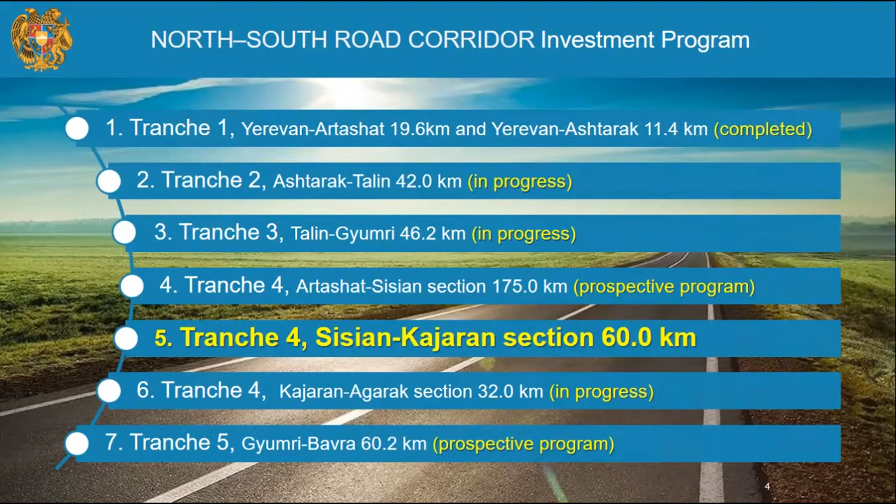On this map you can see the geographic location of the tranches. The southern section of our program is Tranche 4, which consists of 3 sections: Artashat-Sisian, 175 kilometers, Sisian-Kajaran, and Kajaran-Agarak.

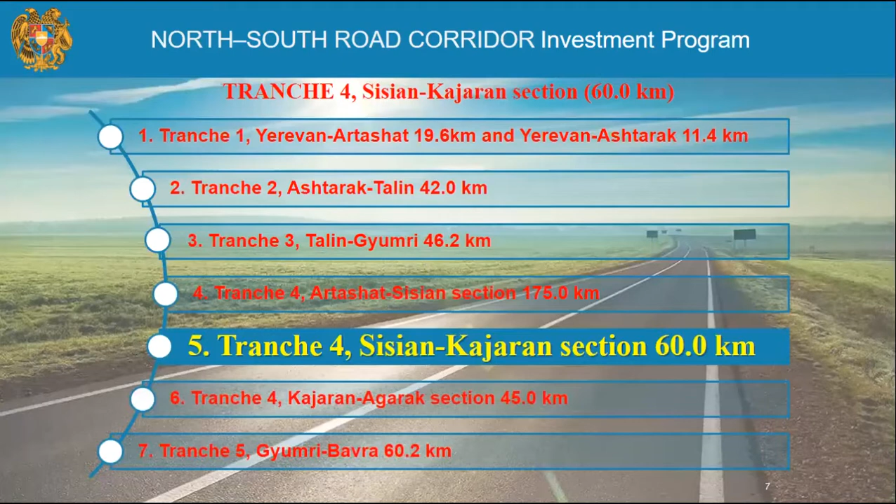Now, a little bit in detail about the Sisian-Kajaran section. This section will be a completely new road. It is planned to construct a new second technical category road with a total length of about 60 kilometers, including 4.7 kilometers of bridges and tunnels totaling 12.5 kilometers in length. The longest is the Bargushat tunnel, with a length of about 8.6 kilometers. The Kajaran section was designed with a new alignment, outside of the existing alignment and interstate road, and the existing road can be used as an alternative road.

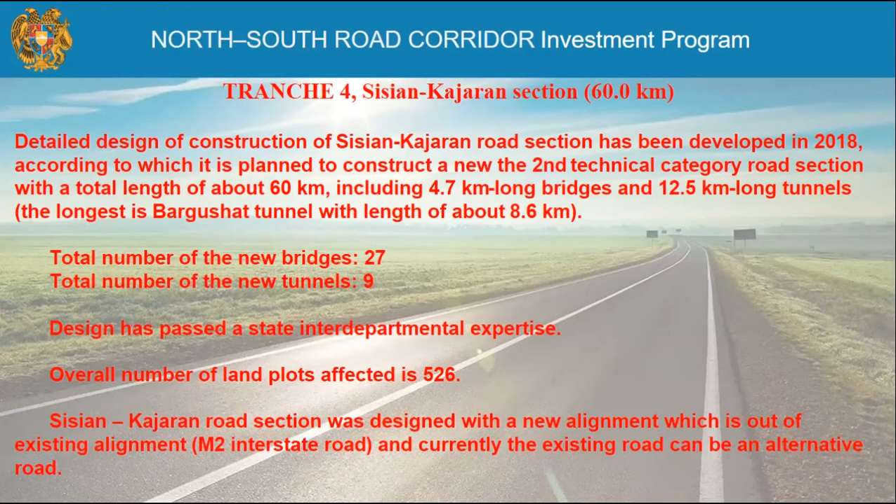This increases convenience for heavy vehicles. The travel time from Sisian to Kajaran will be reduced, which will reduce travel costs. Next slide, please.

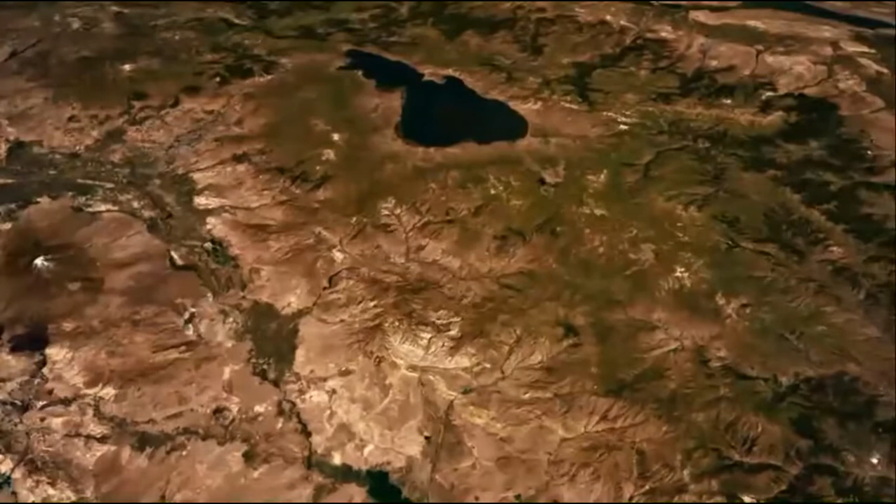North-South Road Corridor, Tranche 4, Sisian-Kajaran section. A preliminary evaluation of the Artashat South-Kajaran section of the North-South Road Corridor has been carried out. The aim of the new road corridor is to create access to the Black Sea through Armenia and Georgia, and then to European countries. It will provide new opportunities of development to all communities along the route from the north to the south of Armenia. The fourth tranche is located in the southern sector. It begins from Artashat and ends on the border of the Republic of Armenia and the Islamic Republic of Iran.

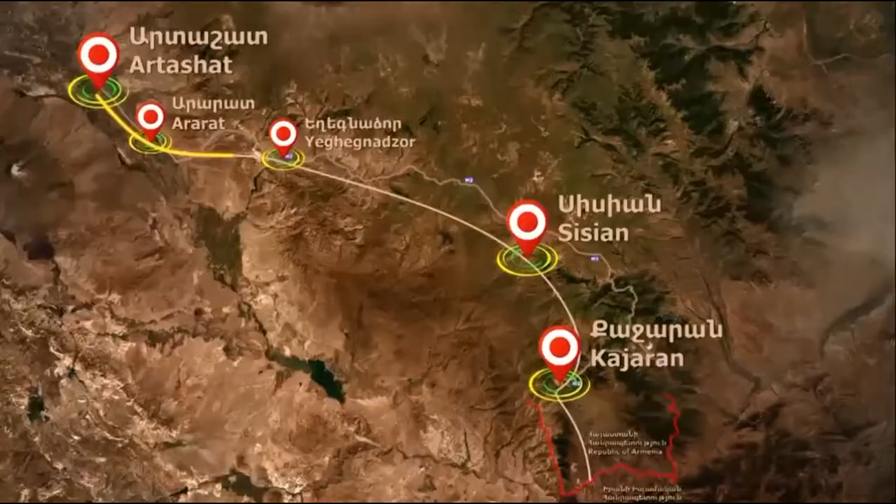The scope of works includes the feasibility study and preliminary design of about 300 kilometers from Artashat South to Kajaran, and about 60 kilometers of detailed design of the priority section.

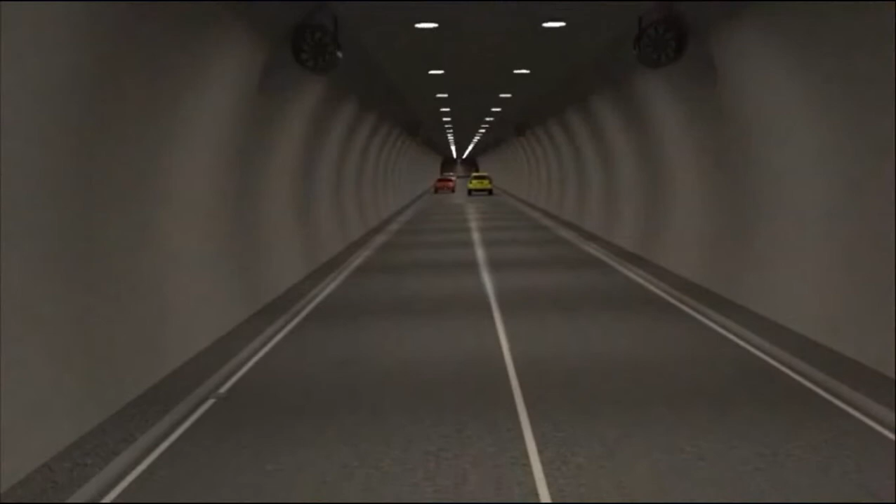Design criteria: the main road cross-section is arranged with two single running lanes, one for each direction, and one climbing lane. Climbing lanes are provided to facilitate the passing of trucks and slow-moving vehicles whose speed drops because of sustained steep grades. Climbing lanes are designed independently for each direction. For tunnel sections, climbing lanes are not included due to the huge increase in cost and the increase in dimension of the tunnel section, compared with the benefits.

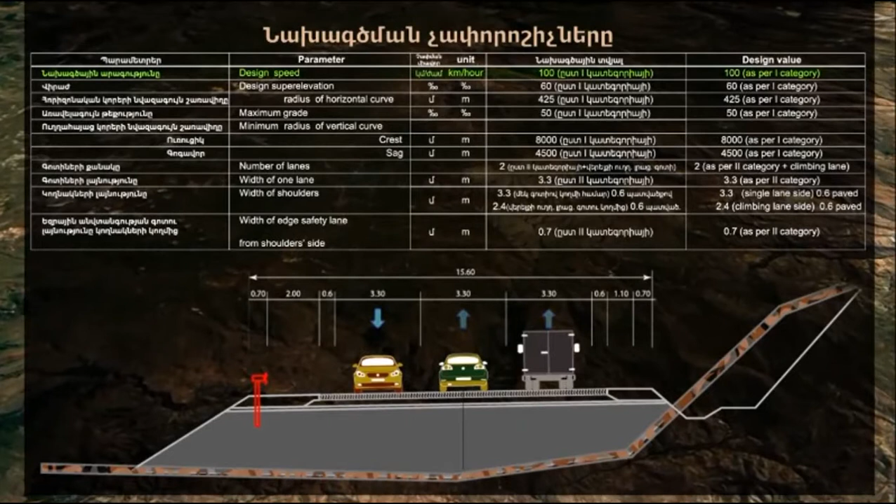Design speed as per first category is 100 km per hour. Number of lanes is 2 as per second category, plus a climbing lane. Width of one lane is 3.3 meters as per second category. Width of the shoulders is 3.3 meters for the single lane side, and 2.4 meters for the climbing lane side.

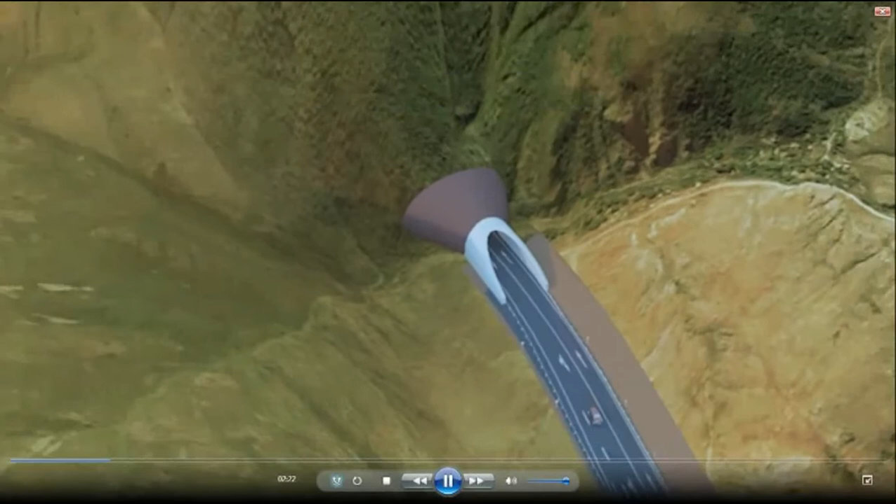Description of Sisian-Kajaran section: it begins from the southern foot of Mount Metsishkhanasar, at 3,550 meters. It crosses the M2 highway, passes through the left bank mountain slope of the Vorotan River, and crosses the Vorotan River through the upper part of Sham water reservoir.

Then it passes through the nearby areas of Vaghatin, Vorotan, Darpaz, Lor communities, crosses the Bargushat Ridge with spot heights of 3,000 meters and higher, through the mountain slope on the left side of the Shenatagh tributary, and passes through the mountain slope on the right side of the Voghji River Valley, in the vicinities of Nor Astghaberd and Geghi community. Finally, it reaches the right side mountain slope of the Kapan-Kajaran road section and continues to the entrance of the communities of Kajaran and Lernadzor.

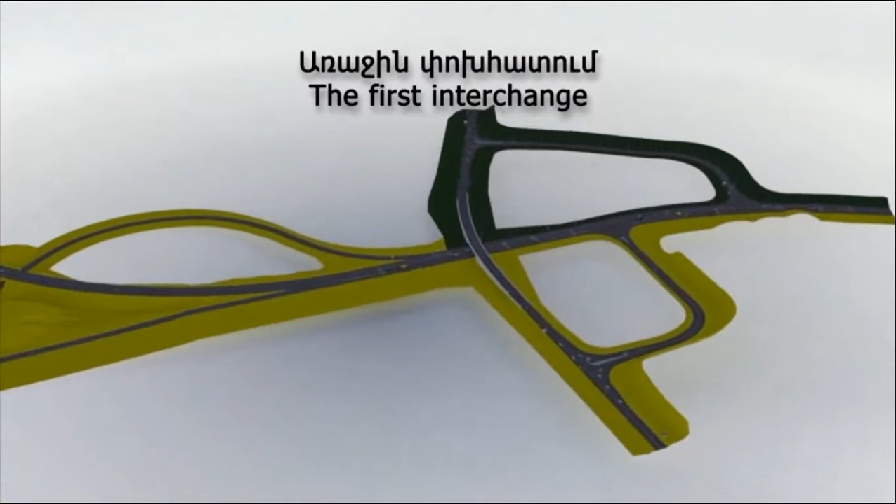Three interchanges are designed for the Sisian-Kajaran section. The first interchange is designed within kilometer 0 plus 0 and kilometer 1 plus 0, with the aim to connect the existing M2 and local roads with the newly designed Sisian-Kajaran road.

The road will be furnished with safety barriers. Road signs will be placed to ensure traffic safety. From this preliminary analysis, in many sites the need for retaining walls is envisaged. The drainage system will be ensured by calculating water flows with culverts of different sizes and drainage chutes.

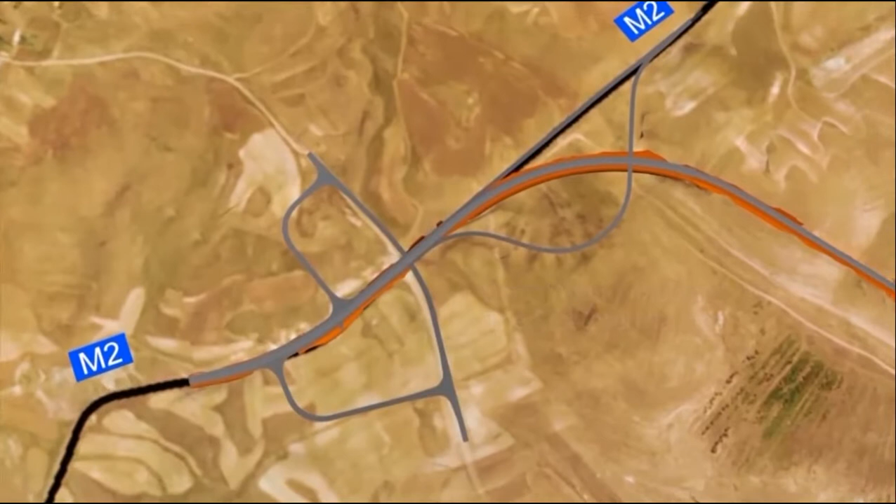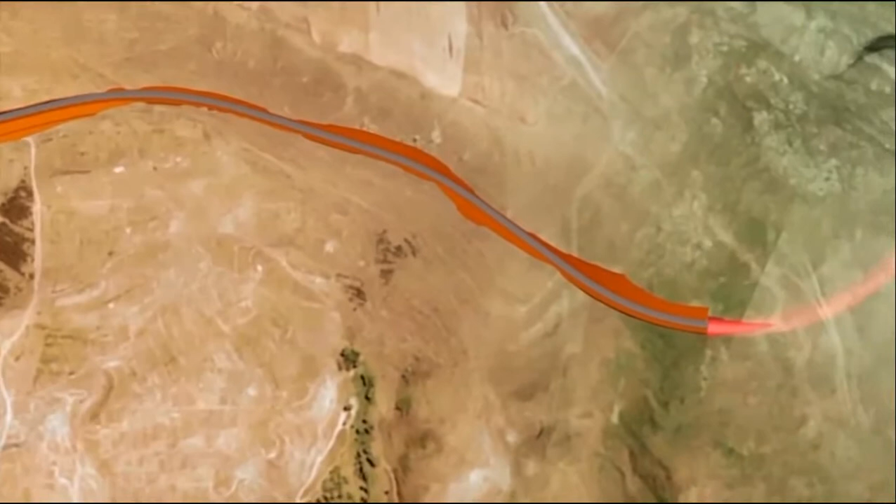Excavated soil and aggregates shall be reused as much as possible. The site location of topsoil stockpiles and excavated material landfill will be properly designed. Permit and access to those sites should be obtained prior to the commencement of excavation works.

Air quality, noise and vibration shall be surveyed during the environmental impact assessment process in order to update the environmental baseline data.

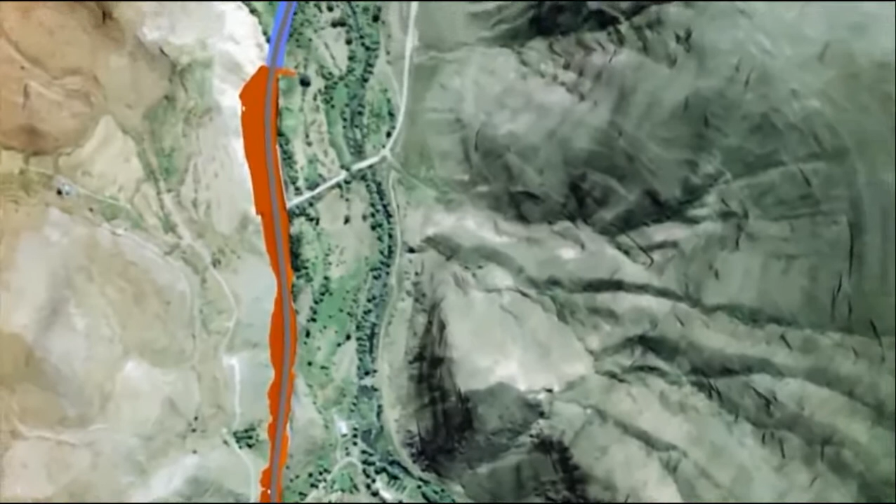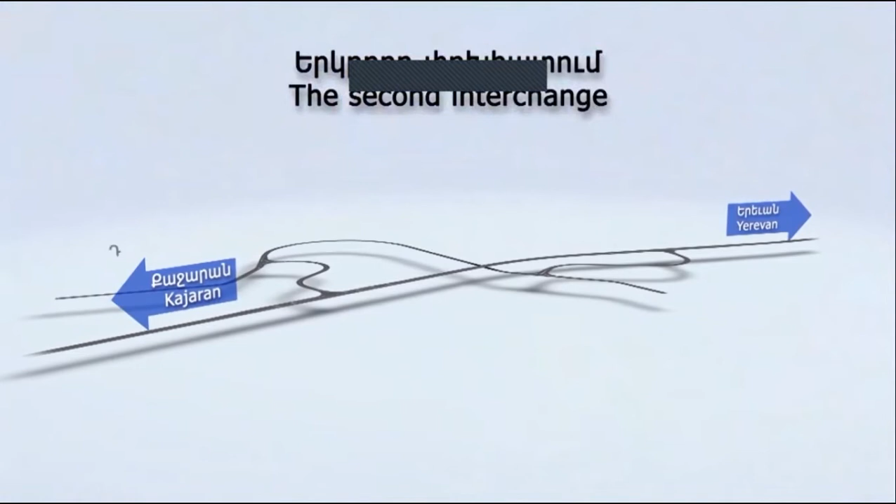The second interchange is designed within kilometer 15 plus 400 and kilometer 16 plus 300, with the aim to connect local roads to Vaghatin, Vorotan, Sham, Lezen, Tatev, Darpaz, Getatagh, Lor, and Shenatagh with the newly designed route.

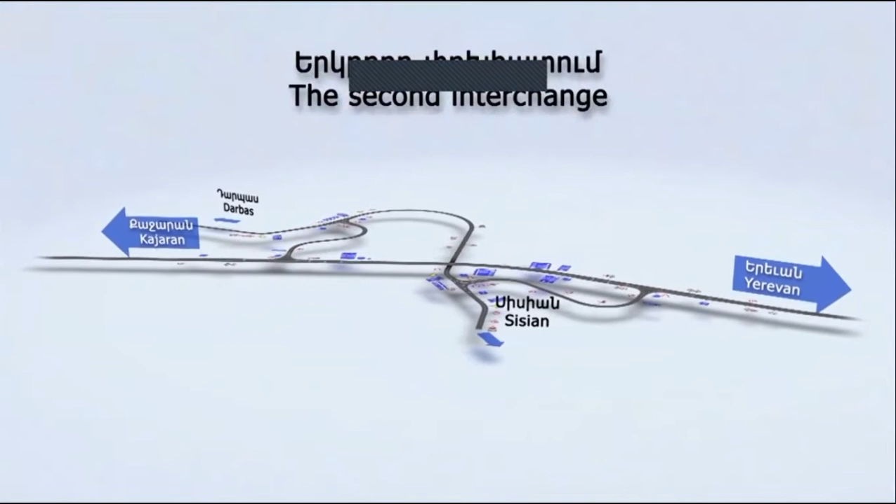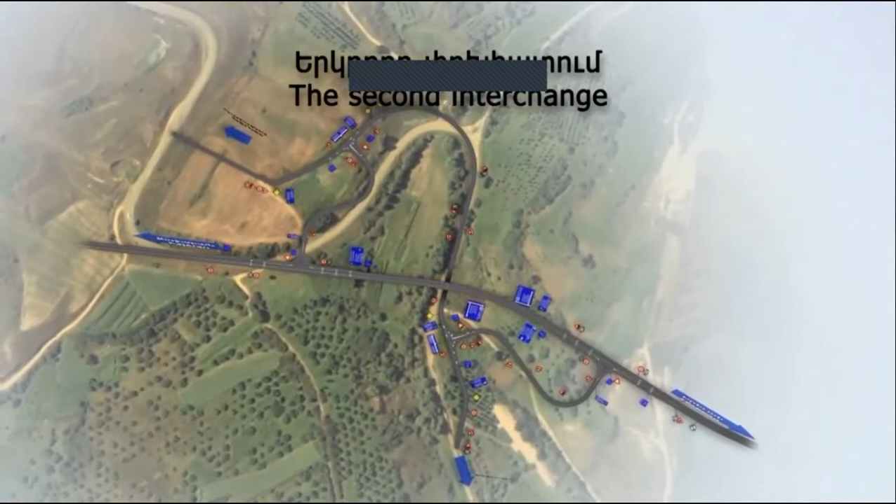The Sisian-Kajaran tranche of the North-South Road Corridor lies in a region of complex geology, characterized by extensive quaternary volcano-sedimentary deposits in the northern part, and by an orogenic belt constituted by sedimentary, igneous, and metamorphic rocks in the central southern part.

Road excavation will encounter a large variety of conditions, ranging from debris deposits, usually in a loose state, through partially cemented lacustrine soils, up to strong, medium to slightly fractured igneous rocks.

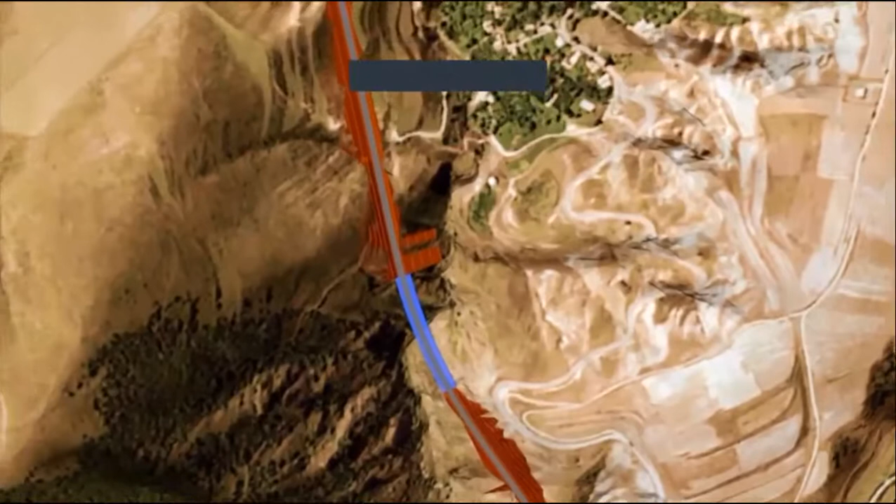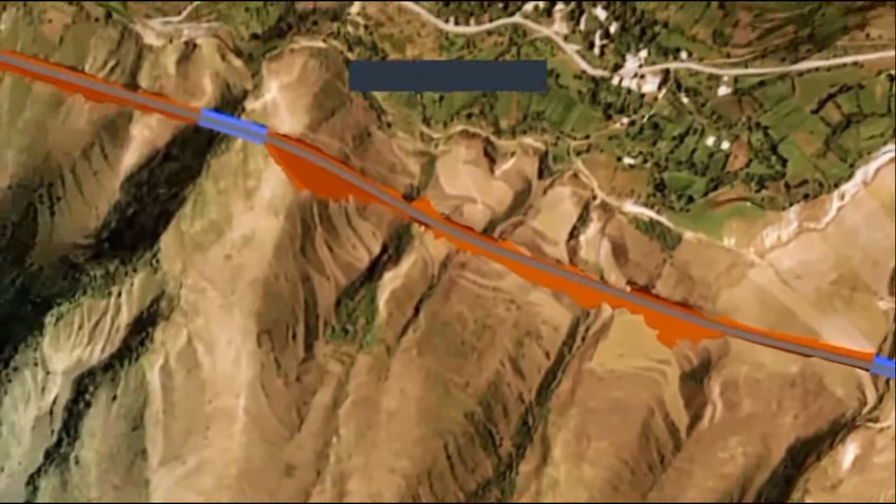Landslide activity along the valley sides is relatively limited, affecting mostly the superficial soil cover. However, a few large paleo-landslide bodies have also been identified that now appear to be in a stable state. Road foundations will usually rest on fair ground. Nevertheless, the use of piles may be required, especially for the abutments and piers of bridge structures crossing loose deposits.

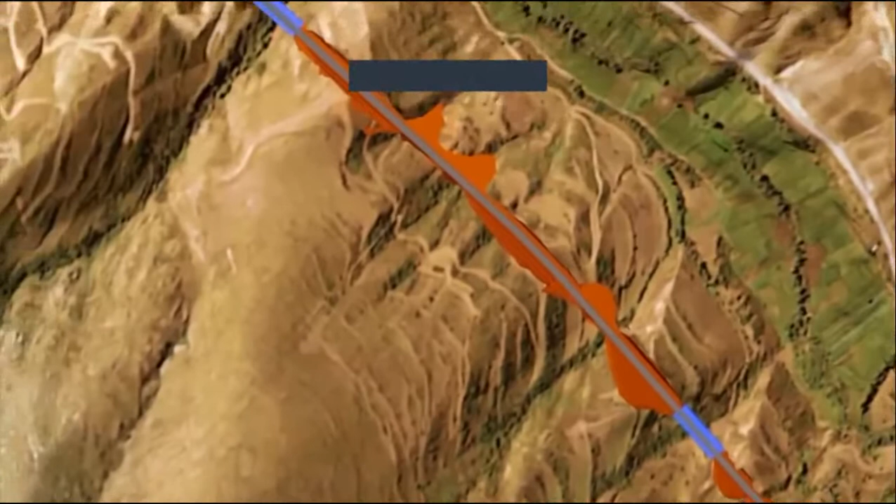The main obstacle of the Sisian-Kajaran road section is represented by the Barghushat Ridge, about 3,200 meters above sea level. The proposed solution is to cross the ridge with the Barghushat Tunnel, which is 8,683 meters long. For this reason, safety issues are an important concern.

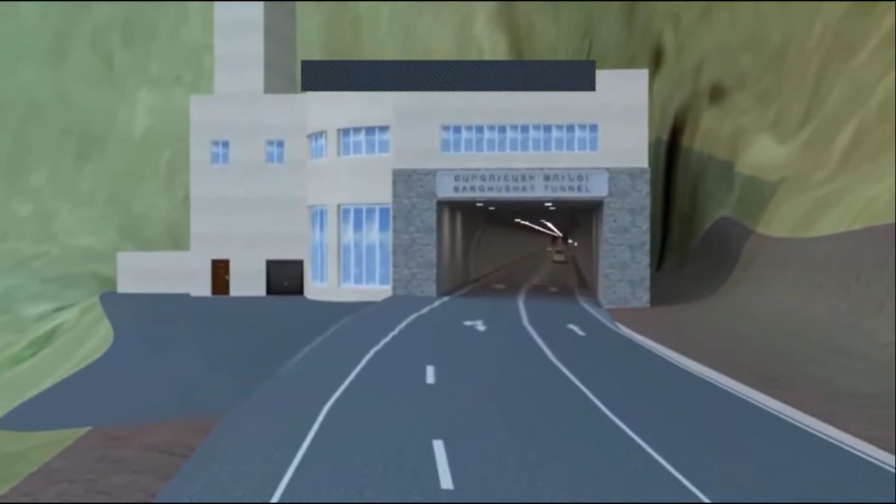The following prevention measures will be ensured: lighting, fire system, escapeway, access to escapeway every 500 meters, lay-by every 1,000 meters, SOS every 250 meters, smoke extraction, and ventilation.

In case of fire, the smoke is extracted by ventilation systems at both ends of the tunnel, inside the smoke extraction duct. People will have an escapeway located under the platform every 500 meters, and then an escape route to a safety place.

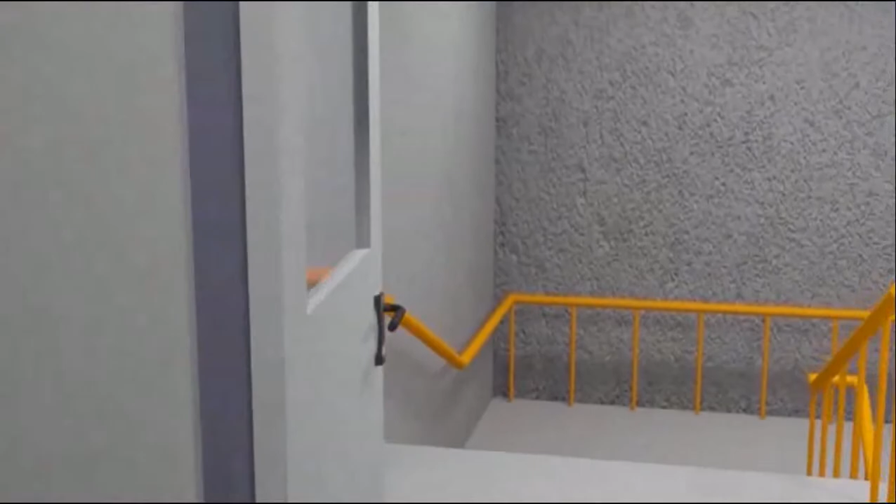In case of fire, passengers can reach the nearest emergency exit, one every 500 meters, and through the door and stairway reach the escapeway located under the road platform, which runs all along the tunnel and finishes at both extremities with an exit to the outside. The entire zone, stairway and escapeway, is kept under pressure in order to avoid the entrance of smoke and allow a safe exit to the passengers.

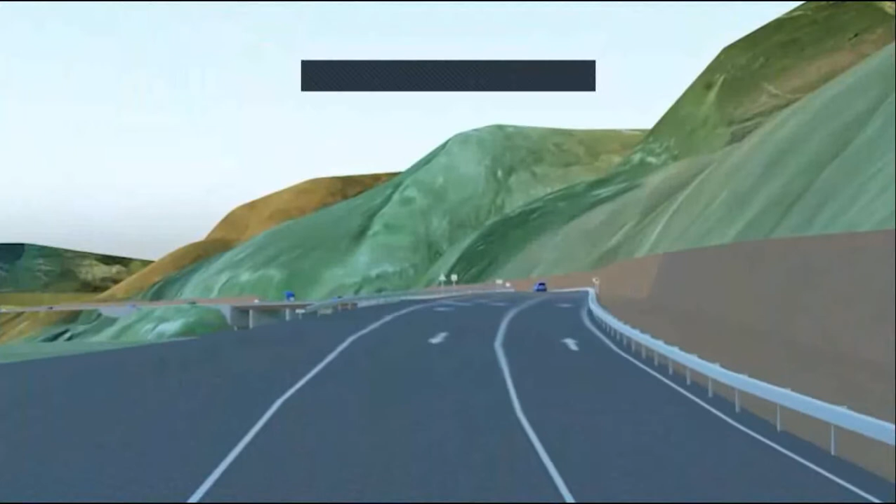The geological conditions along the base tunnel, with length exceeding 8 kilometers and a maximum overburden of 1,160 meters, are foreseen to be extremely variable due to the complex geological structure of the Bargushat mountain range. Therefore, a high level of geological risk should be expected.

Up to the Barghushat Tunnel and after that, the area is characterized by challenging terrain, especially in terms of vertical slopes. Due to the complicated relief features of the area, a large number of bridges and tunnels are designed.

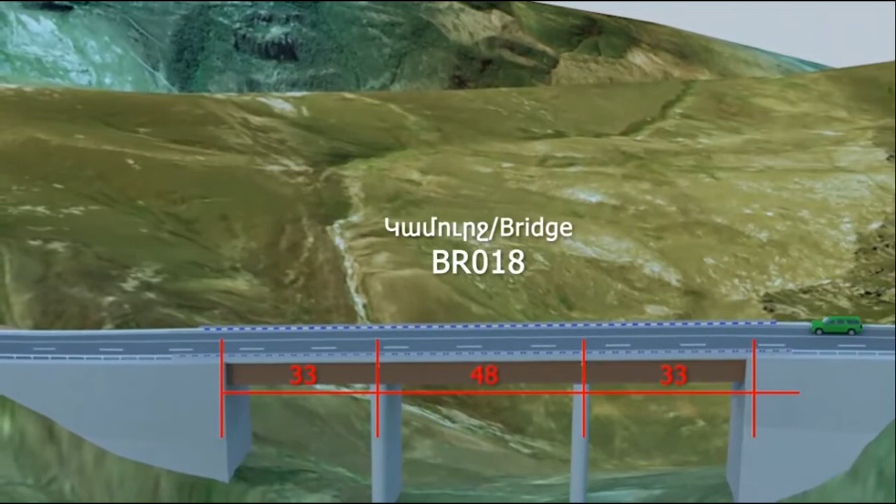There are numerous archaeological and historical cultural values in the area: ancient settlements, castles, churches, tombs, and so on. The number of archaeological sites is likely to increase after a more detailed study and research of the area.

The road is located in an area with high recreation and tourism activity, and it is obvious that the implementation of the project may have a direct impact on it.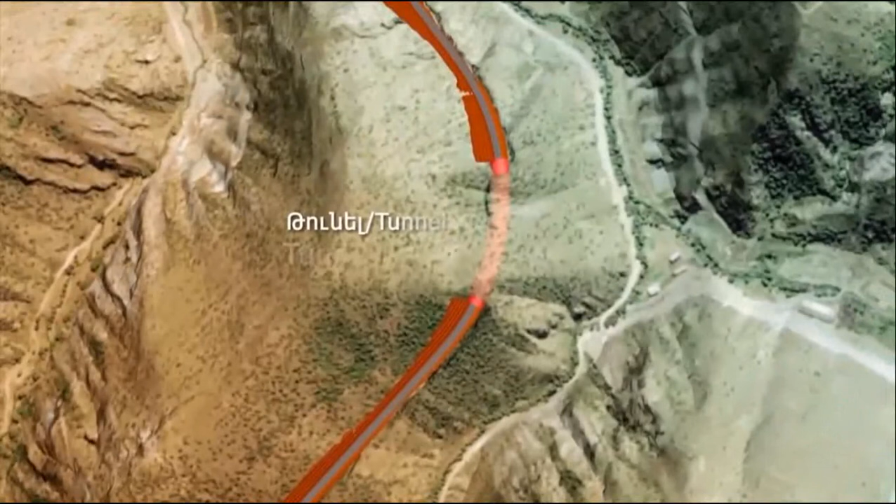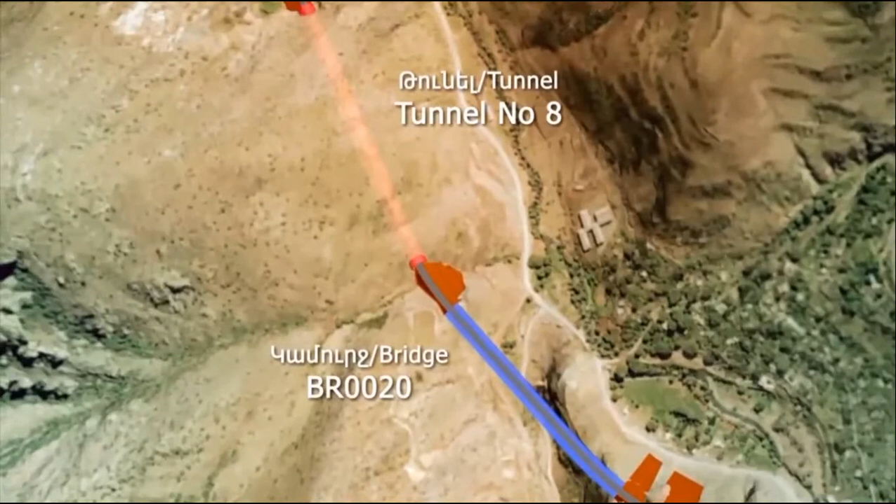In the cut sections, the maximum height of the cut is 10 meters. The slope of the cut is related to the type of soil. Every 10 meters, a 2-meter bench is located to assure the stability of the cut and to accommodate the rolling material coming from the top.

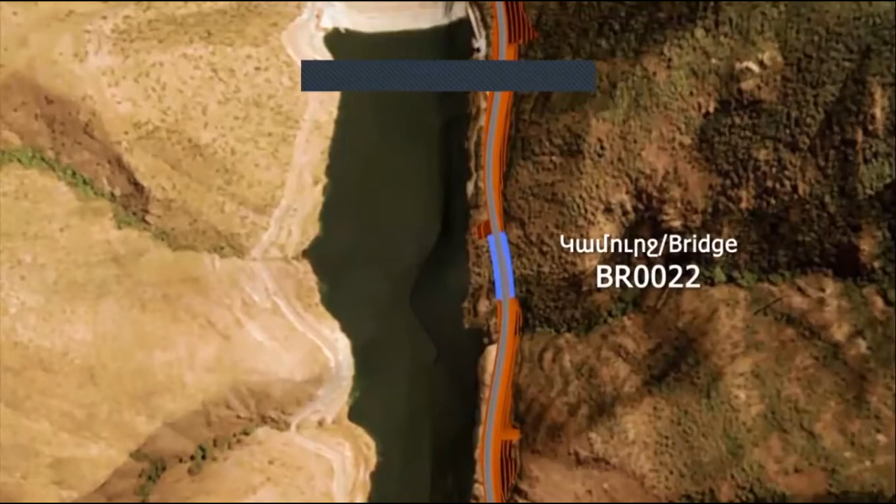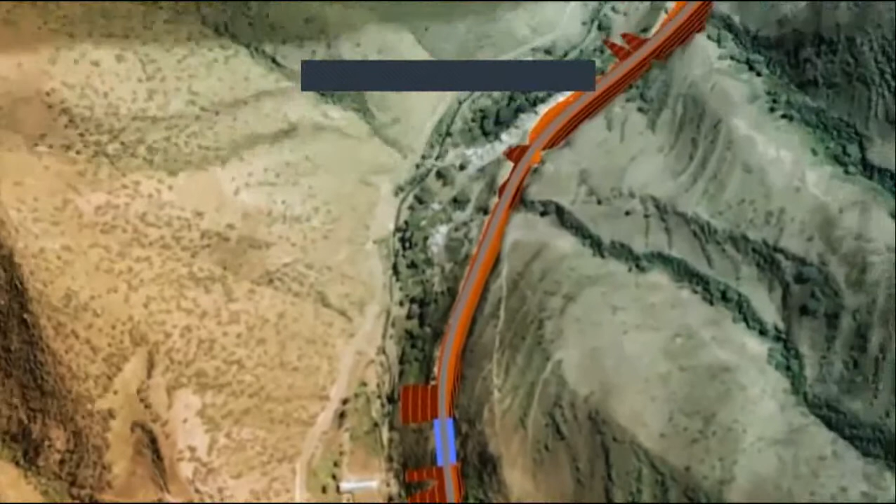There are agricultural and non-agricultural, special use, forest, and water lands in the affected communities of the Syunik province. Most of the affected lands are community-owned. The studied corridor project does not have any negative impact on the quality of the soils for the surrounding areas.

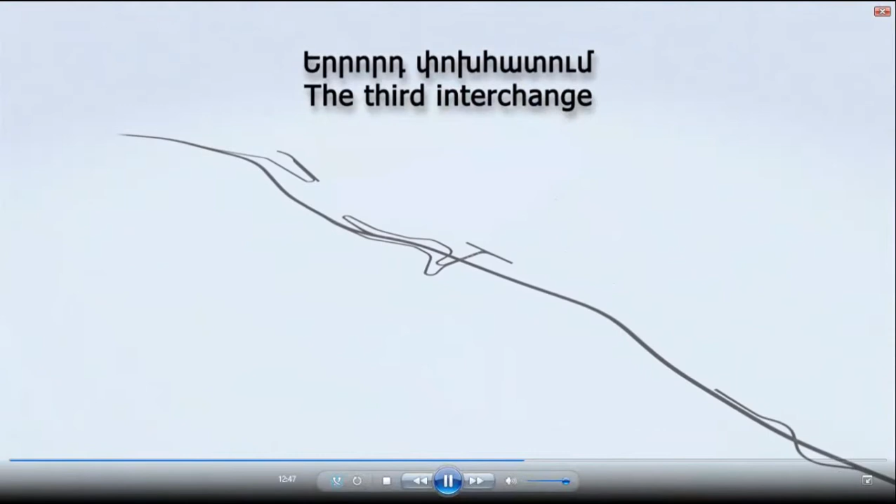The third interchange is designed to connect the newly designed road section to the existing road between kilometers 55 plus 500 and kilometer 59 plus 0, through which the movement of vehicles will be implemented with Kapan and adjacent communities.

This intersection will give an opportunity to move with separate ramps, from Kapan to Sisian, from Sisian to Kapan, from Kapan to Kajaran, and from Kajaran to Kapan.

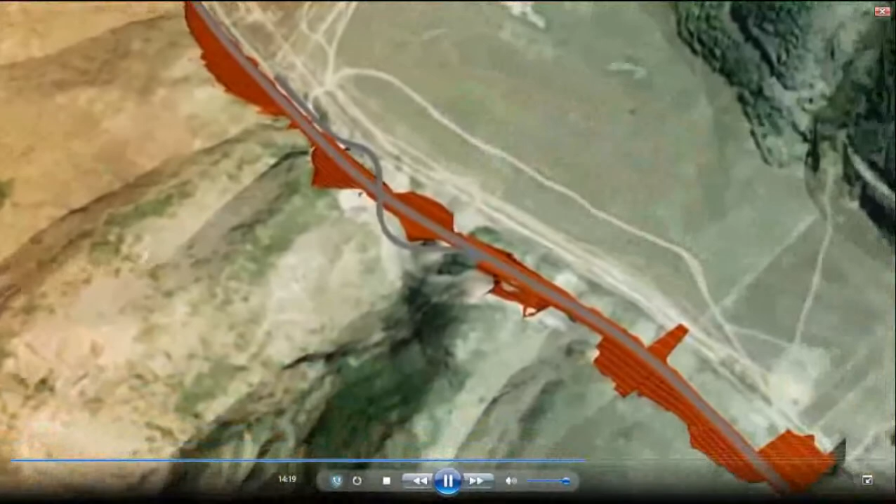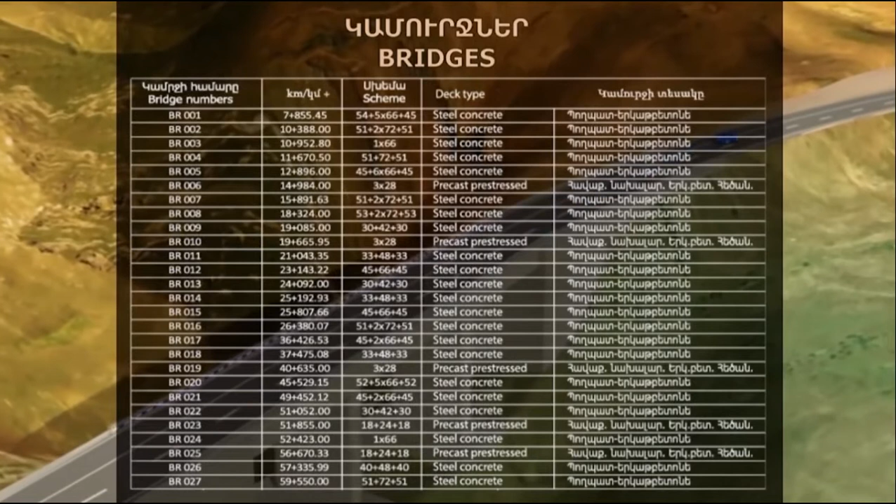Bridges. The main structures of the project consist of bridges aimed to cross valleys, rivers, or other kinds of obstacles. The total number of bridges is 27, grouped into the following main typologies: steel concrete bridges with maximum span length up to 72 meters, and precast concrete bridges with maximum span up to 28 meters.

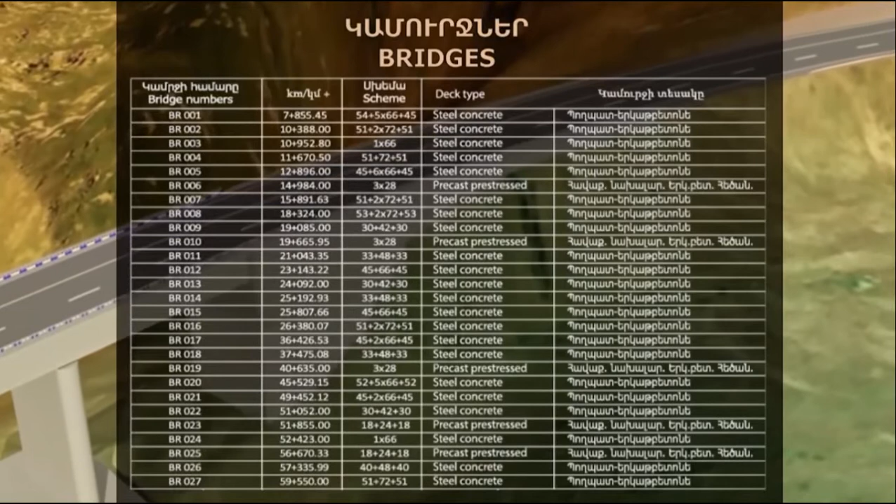The Sisian-Kajaran area is totally mountainous and more difficult and challenging to deal with. Depending on the steepness of the valleys, most of the bridges, 22, are built with a steel concrete deck, while the other 5 are made with prestressed precast beams, which are cheaper. In terms of length, the steel bridges make up more than 90% of the total length of bridges.

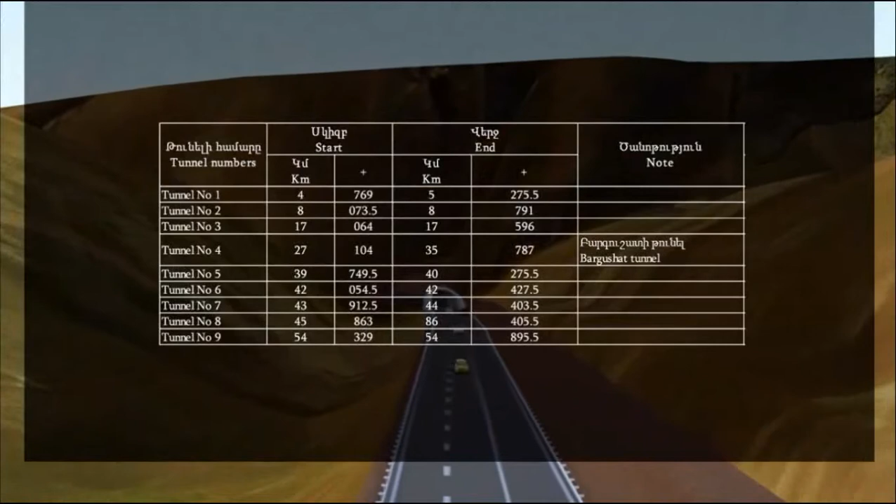Tunnels. For the design of the 9 galleries included in the project, it has been assumed that only a single tube will be constructed, meaning a single carriageway with two-way traffic. The construction of the second tube is postponed to another phase. The total tunnel length is...

12,938 meters. The number of galleries less than 1,000 meters is 8, totaling 4,255 meters. The minimum and maximum cross-sections of short tunnels are 110 square meters and 128 square meters.

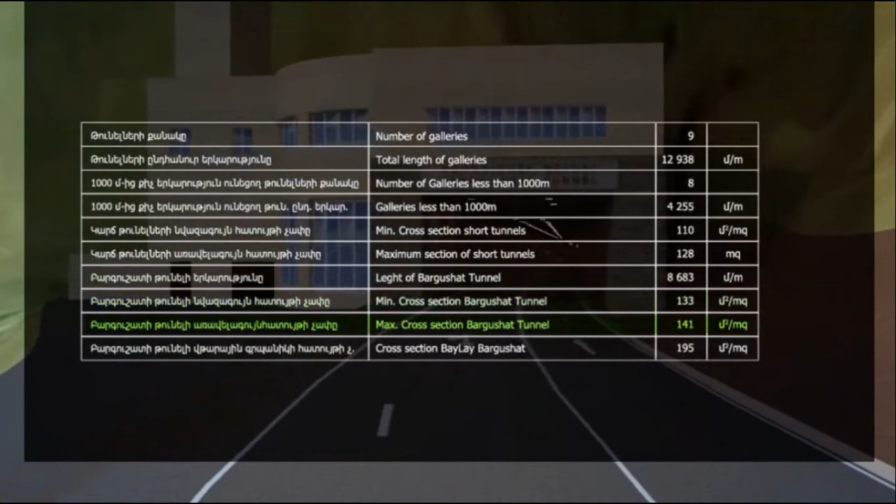Length of Bargushat Tunnel is 8,683 meters. Minimum and maximum cross-sections of Bargushat Tunnel are 133 and 141 square meters. Cross-section of the BayLay of Bargushat Tunnel is envisaged to be about 195 square meters.

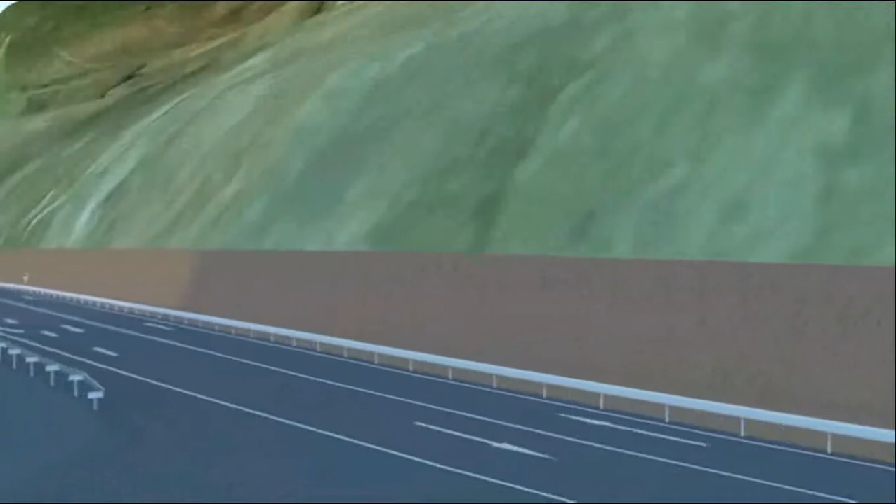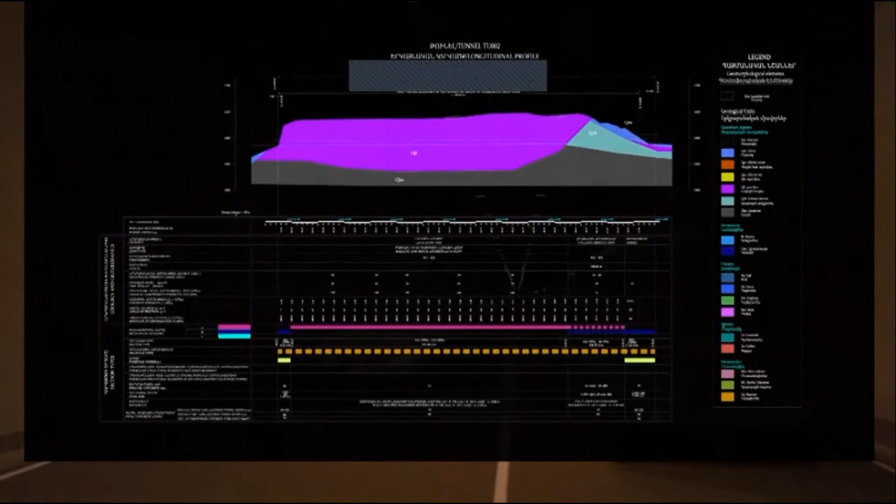The input data were reported on the profile and accordingly the different sections are applied, giving a change at the beginning and a change at the ending of the tunnel. A numeric evaluation of the structural parts, number of micropiles, thickness of the lining, typology of the steel ribs, etc. The sections A, B, C to be applied, with a percentage of application of the sections when there is more than one in a single part.

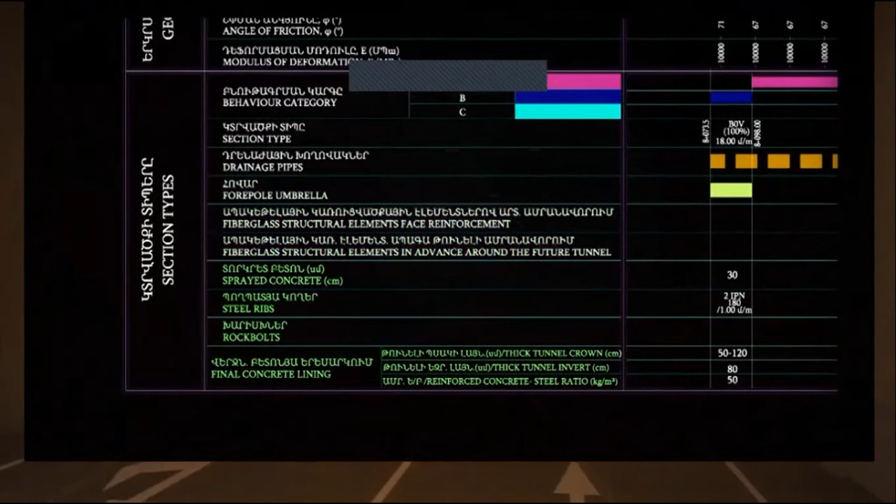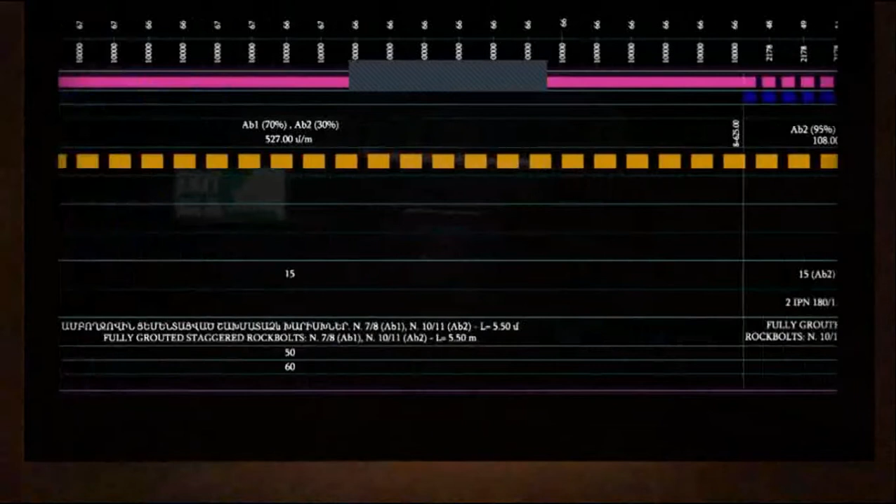Of course, there will be also a guideline to help choose the right section depending on the real condition of the rock, directly observable during the works. Sometimes it was preferred to give different sections of application with a percentage for each of them. This will allow the engineer, during the works, when the face front of the gallery is directly observable, to choose the better one among different types.

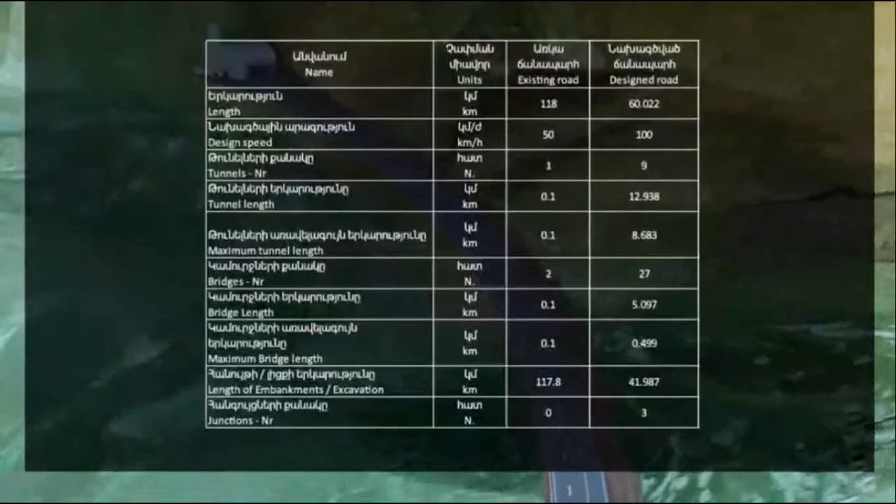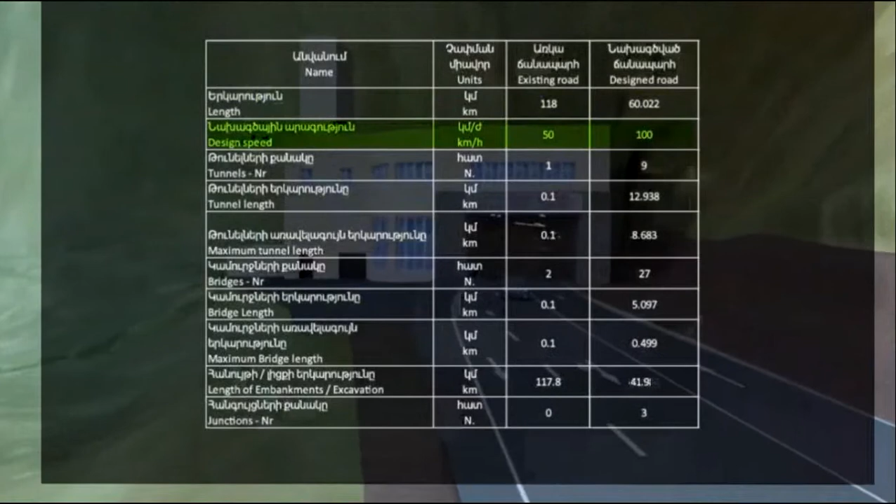Conclusion. Summarizing the data, we can say that the length of the designed Sisian-Kajaran road section is 60 km and 22 meters. Design speed is 100 km per hour. Number of tunnels is 9. Number of bridges is 27. Number of interchanges is 3.

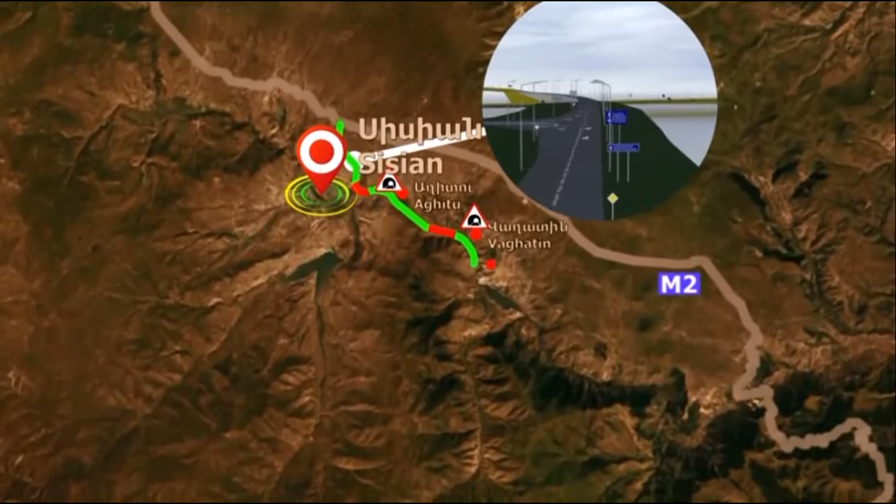To study the historical, cultural, and archaeological resources along the alignment of the Sisian-Kajaran road project, three information sources were used: the state's list of immovable monuments of history and culture of the Republic of Armenia for the Syunik province, and unpublished survey data of several archaeological teams working in the targeted areas since 1990. Field investigations were conducted along the alignment for the record of resources having historical, cultural, archaeological, paleontological, and spiritual significance.

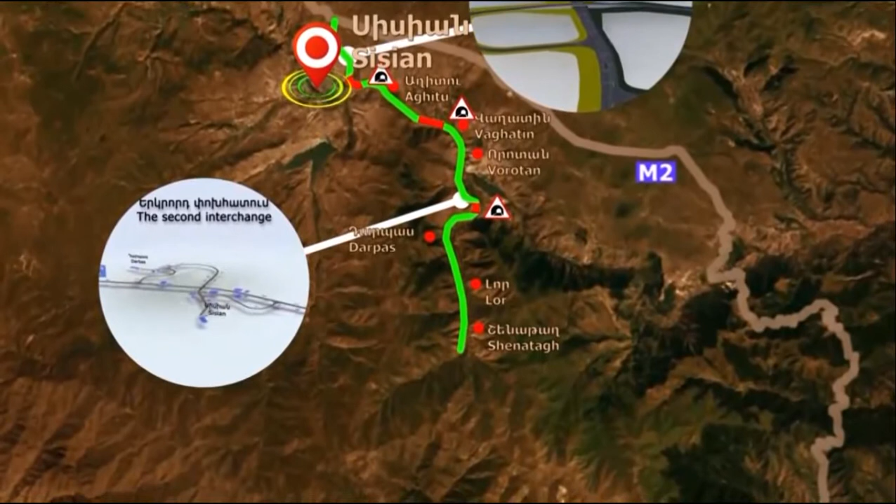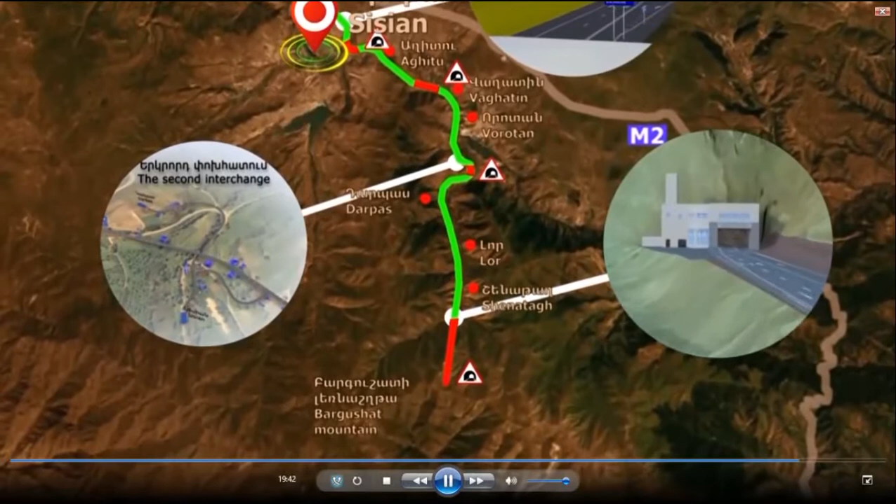The potential negative impacts, such as nuisances from dust, noise, traffic and access changes, are likely to be experienced by nearby communities. The impact on flora and fauna associated with the location and construction works will be temporary and can be minimized by following the site-specific environmental management plan, providing adequate supervision and ensuring the timely implementation of the mitigating measures outlined in the environmental management plan.

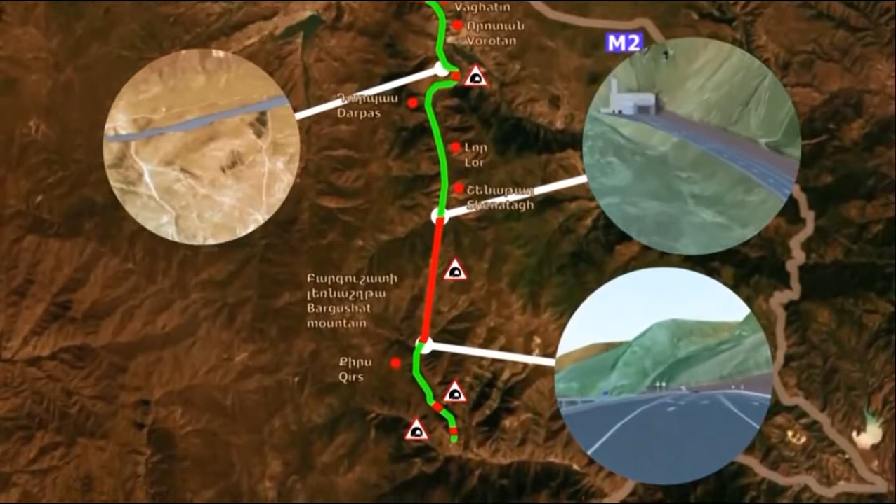Noise mitigation measures shall be implemented in order to reduce noise impact during the operation phase. For example, a 2 meters high noise barrier will be installed at the impacted hospital.

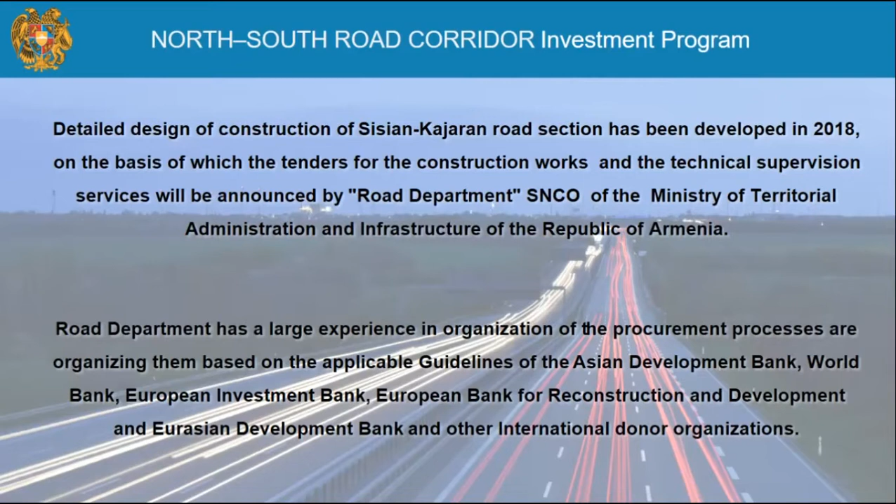Road Department also has successful experience working with different international organizations, construction firms, and consulting firms providing design and technical supervision services. Currently, Road Department is working on several ongoing projects at different stages of implementation, financed by different donor organizations. Road Department has successfully implemented various large projects previously, covering contracts similar to the envisaged contracts with regard to cost and complexity.

Road Department is also responsible for contract management during all implemented projects for civil works and consulting contracts, and has a project coordinator and contract manager who will be responsible for management of the project.

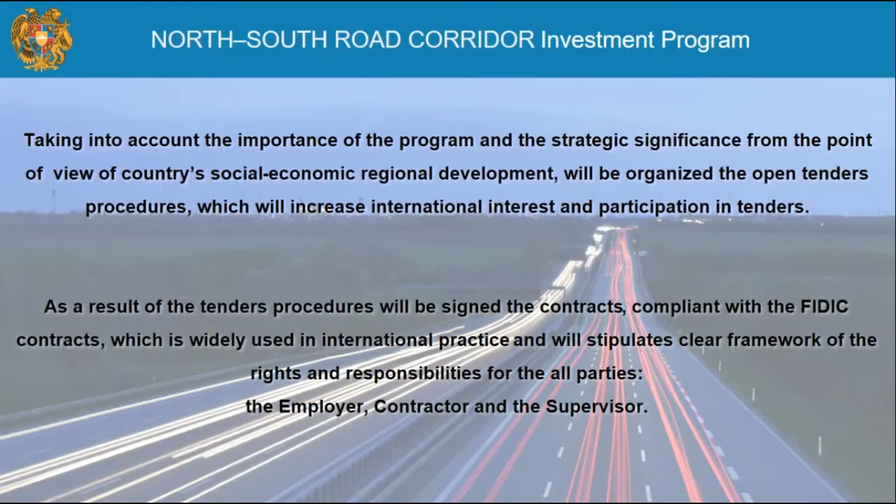Taking into account the importance of this program and its strategic significance from the point of view of the country's social, economic, and regional development, the tenders will be organized in an open procedure, which will increase international interest and participation in tenders. As a result of the tender procedures, contracts will be signed compliant with the FIDIC contract, which is widely used in international practice and will stipulate a clear framework of rights and responsibilities for all parties: the employer, contractor, and supervisor.

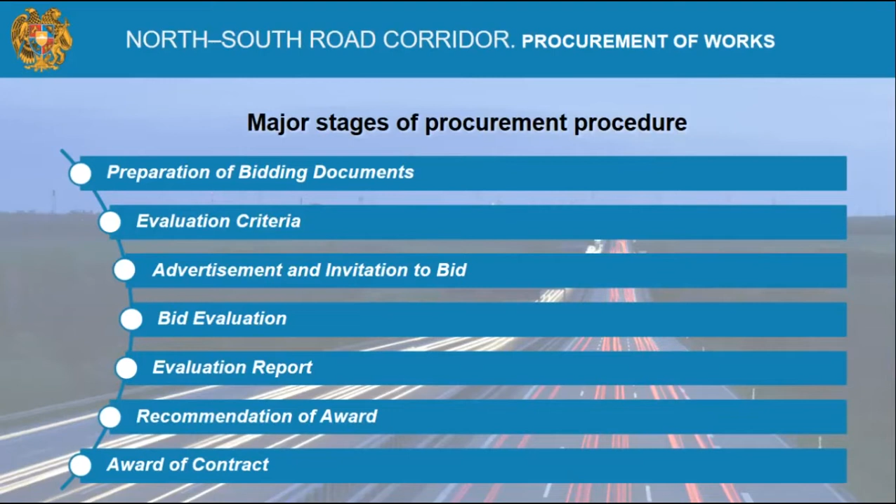Now let's go ahead with the major stages of the procurement procedure for civil works. These are: preparation of bidding documents, evaluation criteria, advertisement and invitation to bid, bid evaluation, evaluation report, recommendation of award, and award of contract.

Publication of advertisement and invitation to bid will be done via mandatory and supplementary means of advertisement. The announcement will be published on Procurement.AM, the official website of the Ministry of Finance; MTAD.AM, the official website of the Ministry of Territorial Administration and Infrastructure of the Republic of Armenia; and Road.AM, the official website of Road Department SNCO.

Also, the announcement will be shared with various national and other sources, including our Facebook page and the Facebook page of our Ministry. Additionally, we are planning to share the announcement with embassies to notify potential companies from their countries.

The timeline for preparation of bids will be counted in days from publication of the advertisement and invitation to bid until the deadline for submission of bids. It will be not less than 52 days.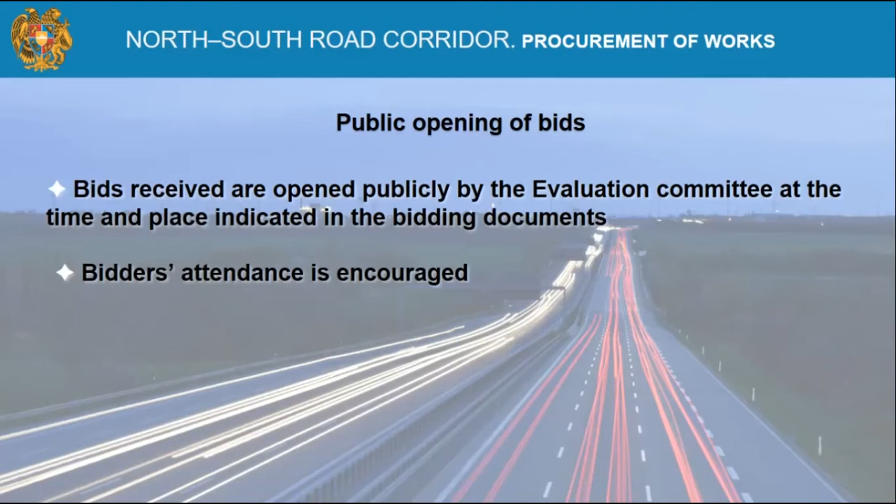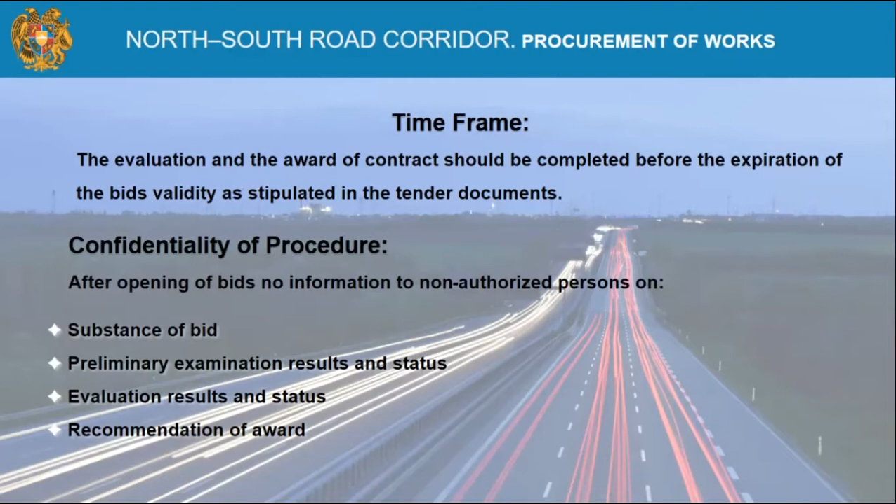The timeframe from evaluation to award of contracts should be completed before the expiration of bid validity as stipulated in the tender documents. Confidentiality of procedure should be ensured. After opening of bids, no information should be given to non-authorized persons on the substance of bids, preliminary examination results and status, evaluation results and status, or recommendation of award.

Let's talk about the major qualification requirements presented in bidding documents. First, experience and past performance—generally meaning similar contracts that participants have satisfactorily and substantially completed as contractor within the last years. We speak about the last 10 years.

Next is financial situation and financial resources, which will be evaluated during the evaluation period. Technical capability: the participant must demonstrate it has the key equipment required in the bidding documents, and must present written confirmation that all proposed equipment is in operable condition, functioning properly, and will be at the construction site when relevant activities start, as described in the working schedule. All requirements regarding equipment type and characteristics will also be described in the bidding documents.

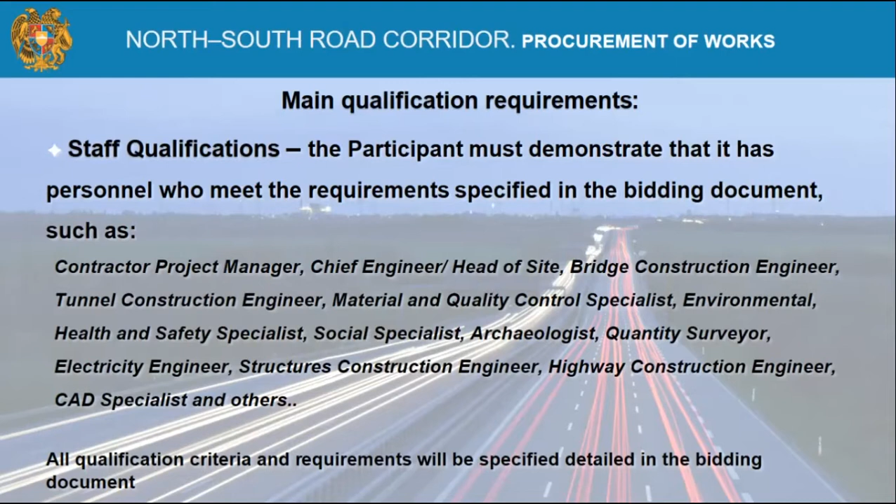The next evaluation criterion is staff qualification. The participant must demonstrate it has personnel who meet the requirements specified in the bidding document, such as contractor's project manager, chief engineer, bridge construction engineer, tunnel construction engineer, and other positions proposed in the bidding documents. All qualification criteria and requirements for each key expert will also be specified in detail in the bidding documents.

After evaluation, publication of evaluation results and contract award will be done on Procurement.AM, MTAD.AM, and Armroad.AM official website of Road Department. The published document will include the name of each bidder, bid prices as read out and as evaluated, names of bids rejected and reasons for rejection, the name of the winning bidder and price offered, and the duration and summary scope of the awarded contract.

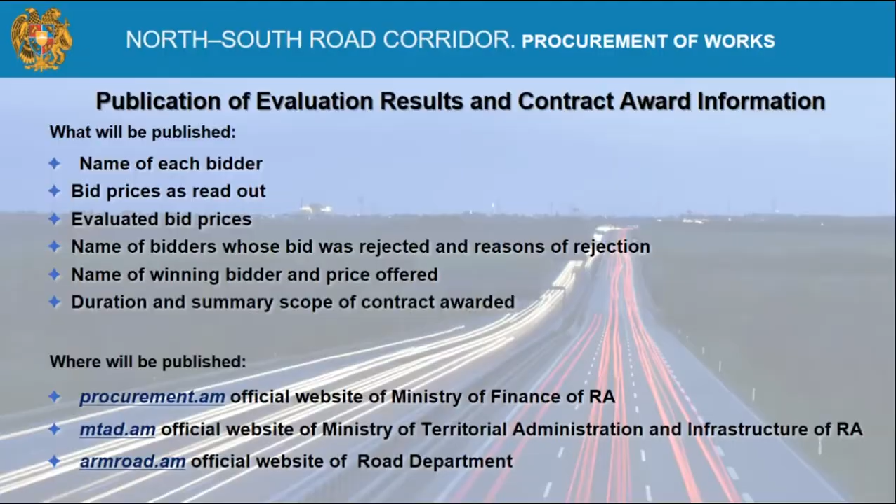So at this stage, I will finish with procurement of works. Now let me introduce the next part of my presentation: procurement of consulting services.

So procurement of consulting services will be organized for selection of engineer services for the Sisian-Kajaran Transport project section.

As most of us already know, the most general part of the tender documents for selection of engineer and any consultant was terms of reference for the assignment. Let's name it TOR. The TOR clearly defines the objective, goals, and scope of the assignment, and provides necessary background information for preparation of proposal for each participant.

In accordance with TOR of this selection procedure, the consultant shall perform duties of FIDIC engineer as described in the FIDIC condition of contract for construction for all civil works provided by the detailed design, including the tunnels and new bridge.

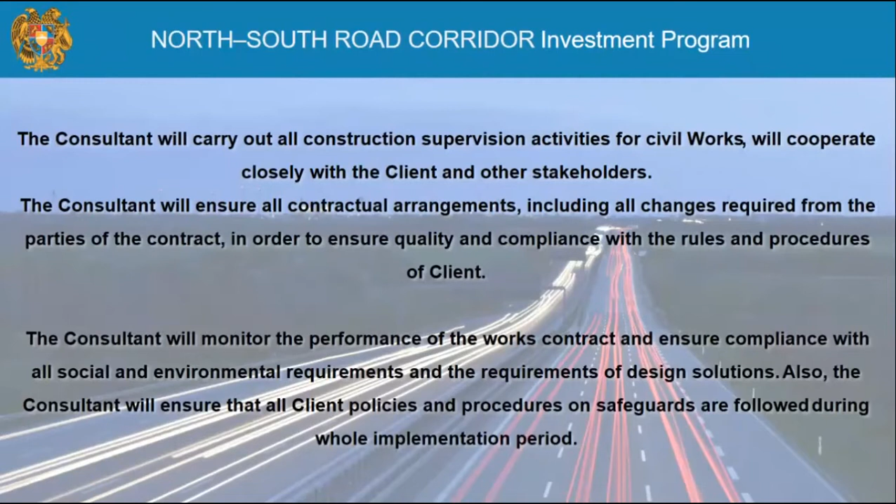Also, the consultant was responsible for development and implementation of an overall monitoring plan and for development of a consolidated construction program showing the critical path of the overall implementation program. During the period of this assignment, the consultant ensures the storage of all records.

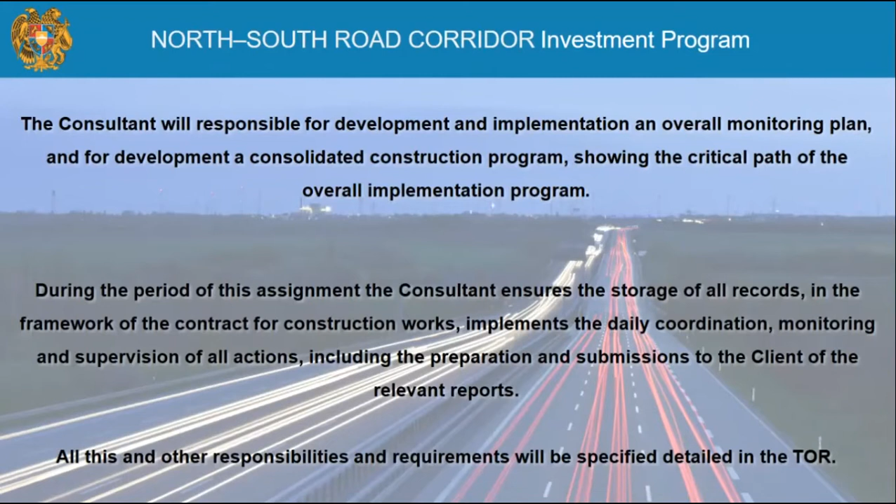In the framework of the contract for construction work, implement the daily coordination, monitoring, and supervision of all actions, including the preparation and submission to the client of required reports. All these and other responsibilities of construction and contractor will be specified in very detailed form in the TOR of the assignment.

Now let's go ahead with the major stages of the procurement procedure. Firstly, preparation of TOR and then tender documents. The next one is the pre-qualification stage. After that we proceed with submission and public opening of proposals. Then will be the start of evaluation of proposals. And finally, contract award.

The announcement of tenders is made via mandatory and supplementary means of advertisement. This part is the same as during civil works, and all announcements will be published on Procurement AM, MTAD AM, and Armroad AM official websites. Also it will be shared with local electronic newspapers and shared with embassies.

The date for preparation and submission of proposals will be counted from the issuing day of invitation to the deadline for submission. For pre-qualification application it will be not less than 30 days, and for preparation of proposal it will be not less than 45 days.

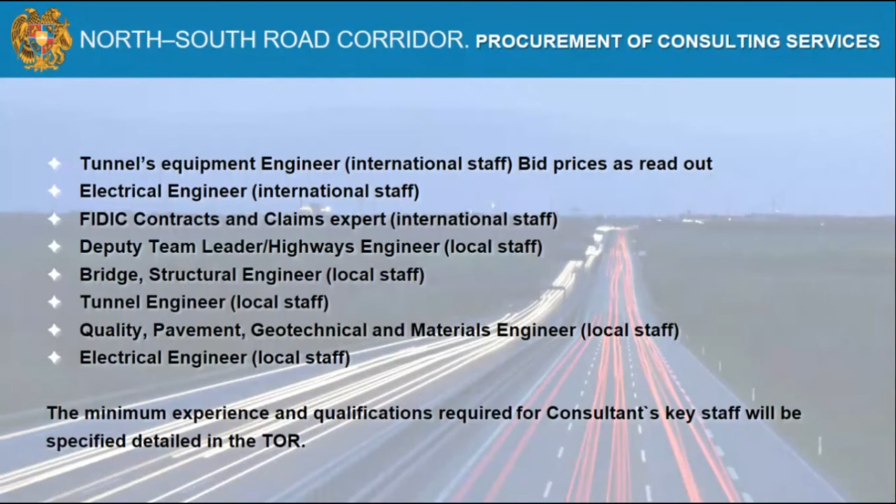Then let's go ahead with local staff: deputy team leader, highway engineer, bridge structural engineer, tunnel engineer, quality pavement geotechnical and material engineer, and electrical engineer. This is the minimum number of staff that will be proposed in our bidding document, and the experience and qualification requirements for consultant key staff will be detailed and specified in the TOR.

After all this stage, after evaluation of results, the contract award and evaluation results will also be published in this source, in Procurement AM, MTAD AM, and ArmRoad AM. In the contract award notice will be published this information: the name of each participant, proposal prices as read out, evaluated proposal prices, name of participant whose proposal was rejected and reason of rejection, name of winning firm and offered price, and duration and summary scope of the awarded future contract. So this is all for this moment about procurement.